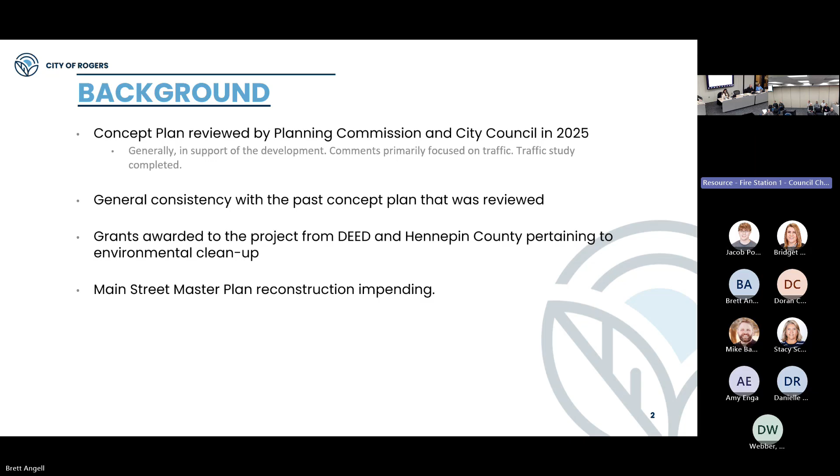A little on the property itself. The owner is currently Willis Enterprises. They were the owner operator that operated the site as a heavy truck repair and service location. There's also tire sales that took place via Hoosier Tires at this property. The developer is a combination of two, both Bader and Ebert. There are representatives from both entities here tonight, should you have questions for the developer. The total size for the property, it's currently 2 parcels, is combined at 4.61 acres.

It is zoned downtown mixed use and guided the same. The downtown mixed use zoning is a mixture of commercial and residential uses primarily. The current use, as mentioned, was heavy truck repair and service. This would be considered a grandfathered use or a non-conforming use based on its current operations. The proposed use is 181 units of market rate or luxury multifamily.

Some of the adjacent uses include commercial/industrial to the east, and I put industrial there for the Lensworks building that's in between this site and the Duffy development site. To the north is a proposed Civic Campus site. To the south is railroad, and then across the railroad tracks is industrial. That property is also grandfathered and is guided in our comprehensive plan as high density residential. And then to the west is industrial, but also grandfathered use and guided as multifamily in different master plans or residential and master plans.

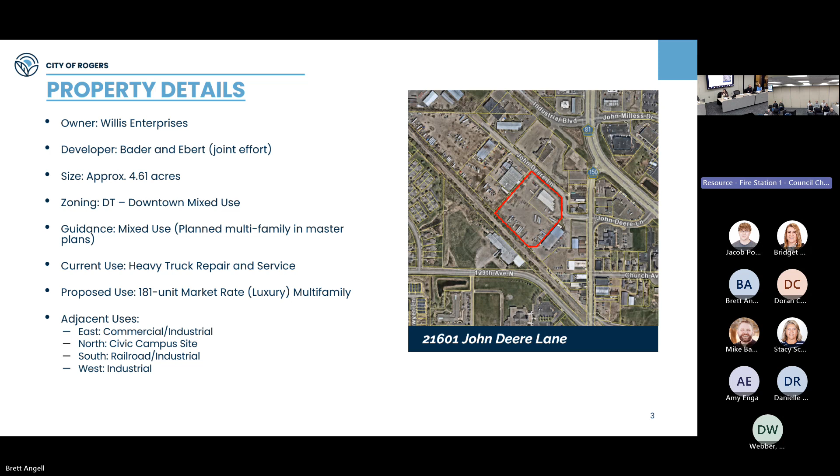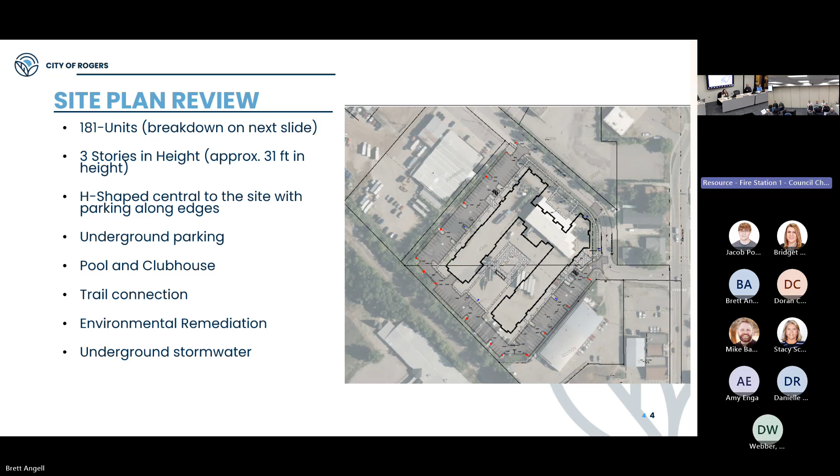A little on the proposed site plan. It's 181 units total. I have a breakdown in the next slide showing the different types of units. 3 stories in height, which is approximately 31 feet in total height, which is well below the maximum height limitations for the downtown zoning district. Overall is an H shape with the parking along the edges, underground parking, a pool and clubhouse and other amenity features, trail connection along the John Deere Lane frontage. And then, as mentioned, there is some contamination based upon the past use of the site, which would have to be remediated as part of redevelopment. And then for the stormwater, it would have underground stormwater.

A little on the zoning: this breaks down to about 39.3 units per acre. The downtown zoning district allows for up to 40, so it's within the range allowed by our zoning guidance. It meets all of our setback code limitations, but most of those are 0. Being downtown, we have the smallest setback limitations, and it exceeds all of those. As mentioned, it meets height.

It is consistent with the past and current master planning efforts we've done. Overall, based on current conditions compared to proposed conditions, there would be a reduction in total impervious surface.

Looking at the parking and unit breakdown, this is very consistent with what you saw at the concept level. Alcove and Studio units would account for approximately 40 of the units, 70 units at 1 bedroom or 1 bedroom plus den, 62 units at 2 beds, and 9 units at 3 beds, for a total of 181. As part of this process, and to understand more from the developer, we asked for a breakdown of what that equals in individual units and people within those units.

The anticipated average would be 1.8 persons per unit, so 326 individuals. It's denoted on the screen that this would be primarily adults, mostly because so many of the units are either 1 bedroom or studio units.

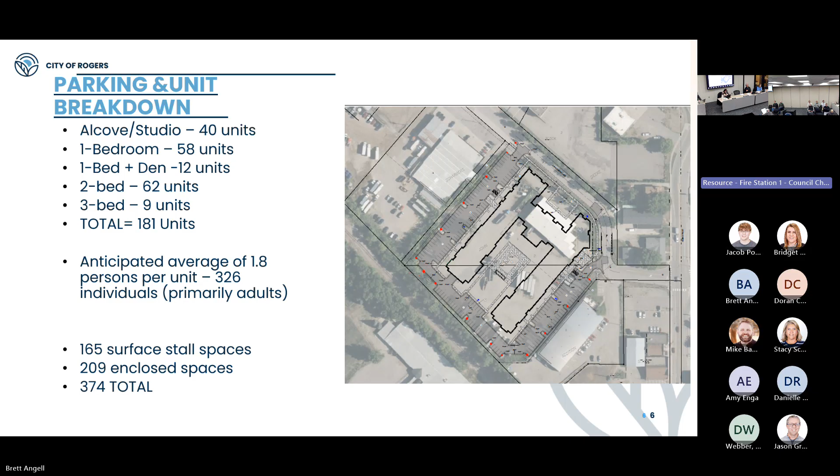For parking, there are 165 surface spaces proposed, as well as 209 enclosed spaces, for a total of 374. This is above what we would require by code. Our code requires 2 to 1, one of which must be enclosed, so they would be required to have 362. They're slightly above that, particularly in the enclosed spaces section.

As mentioned, they did complete a traffic study that was included in your packet for review. The assumption is a 2028 completion of the project, following the Fletcher Bypass being open to the public. In total, there would be 1,124 daily trips, including both in and out trips. They studied a few different intersections that would be the primary intersections corresponding to this development.

There are very minimal impacts to those intersections, with most seeing a 1 to 2 second change. I'll also note the consultant who completed the traffic study is here if you have specific questions related to that. One note on the last bullet point: the future potential John Deere to industrial connection was not included in the traffic study, so that would potentially further reduce traffic volumes onto Main Street. But that was not an influencing factor in the numbers you see for the intersections.

For the landscaping, 38 total new trees would be planted, primarily focused on the John Deere lane corridor. This is really to enhance the pedestrian feel for the John Deere corridor, which is a component of our master planning process, creating an overall pedestrian corridor as this redevelopment continues to the west. Additional shrubs and grasses are proposed along the edges of the building as well.

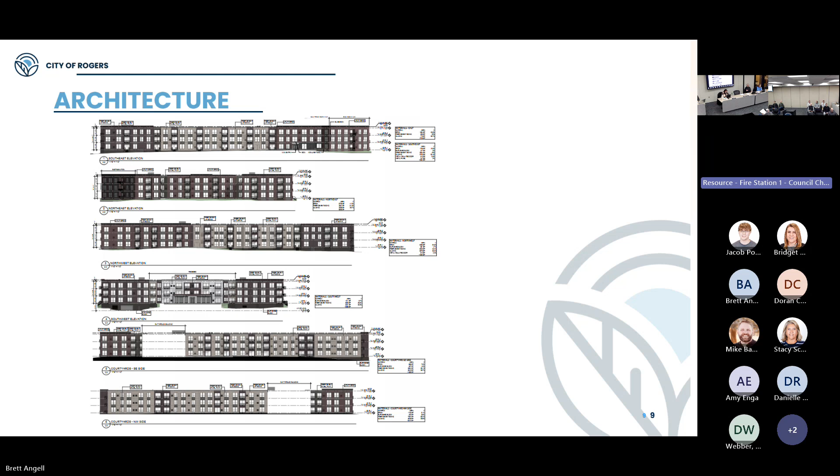So a little bit on the downtown vision. This has been part of past and current master plans and comprehensive plans, really seeking to redevelop some of the industrial uses away from Main Street, trying to focus more on potential uses that are more cohesive to Main Street, bringing those in.

Also removing substandard buildings and promoting environmental remediation. As part of this overall process, working with the developer, the building existing on site was deemed substandard. Integration of housing supports and advances commercial viability on Main Street - obviously the thing that benefits commercial businesses the most is nearby individuals who would shop at those businesses or restaurants.

Then, as mentioned, a big component from the architectural standpoint in discussions with the developer was the incorporation of brick to be cohesive with the varying generations that have developed on Main Street. Brick has been one consistent thing throughout. And then the incorporation of sidewalk connections for future pedestrian connectivity throughout the area.

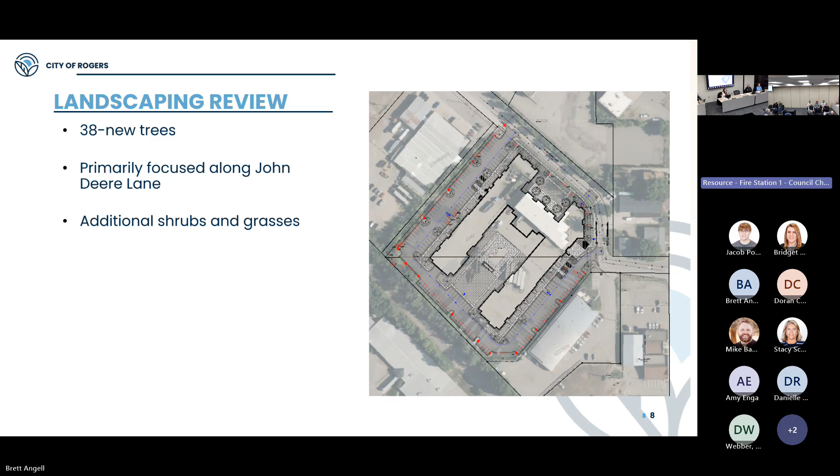Brett, can you explain that proof of parking? What is that? Let me go back to the site plan, that'd probably be the best way to show it. You can see the little laser pointer here. So what the proof of parking would be is essentially it shows that there is a potential to add it, but it wouldn't be built at the time of the development.

You see this very commonly with industrial developments, especially on the speculative side, where our code may require a high number, but they build less than that while showing they have the area to add the additional parking should it be needed. So what the Planning Commission's recommendation was, to look at that railroad side and see if some of those wouldn't be built at the time of the development, so that would stay as grass or green space.

Would it stay as impervious or pervious? It would be surface, pervious, yeah. Unless it was built, then it would become impervious.

Also one other thing to mention that I forgot to do during the PowerPoint: as part of the traffic study, we had them explore what a commercial use would be on that site instead of a residential use. The traffic counts were about 2.5 times higher as a commercial use, as a 30,000 square foot grocer, compared to this proposed development.

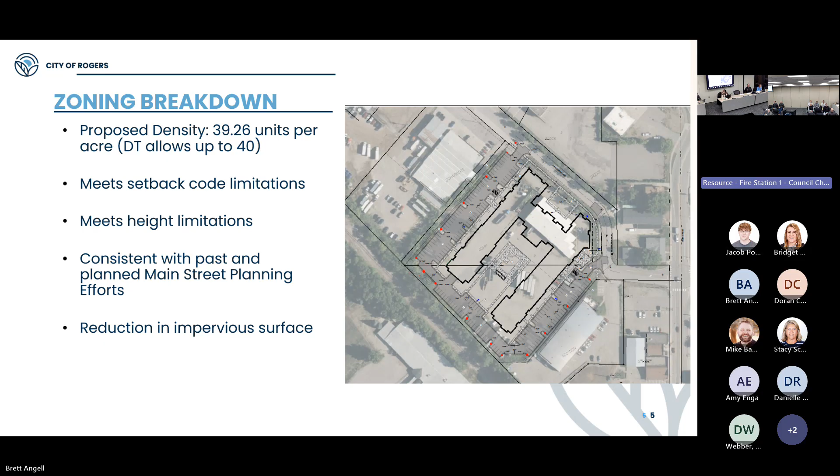Mayor, do you mind if I chip in with a question? Is that all right? Thanks.

Brett, so I see that in the proposed approval resolution, the first condition is that the applicant here would, if this gets approved, have to enter into agreements in the future. And then the fifth is that the site will have to be replatted to a single lot. Taken together, are you contemplating that there would be a development agreement, a subdivision agreement associated with this?

I can't tell if there are many public improvements on the development site or if there are not too many. Yeah, Madam Mayor and Council, we do anticipate that there would be a development agreement as part of this. There are not many public improvements for it, but just general consistency with and intensity of this development itself. There'll also be separate agreements related to it should TIF be granted in the future that would have their own agreements, but I do anticipate a development agreement for this.

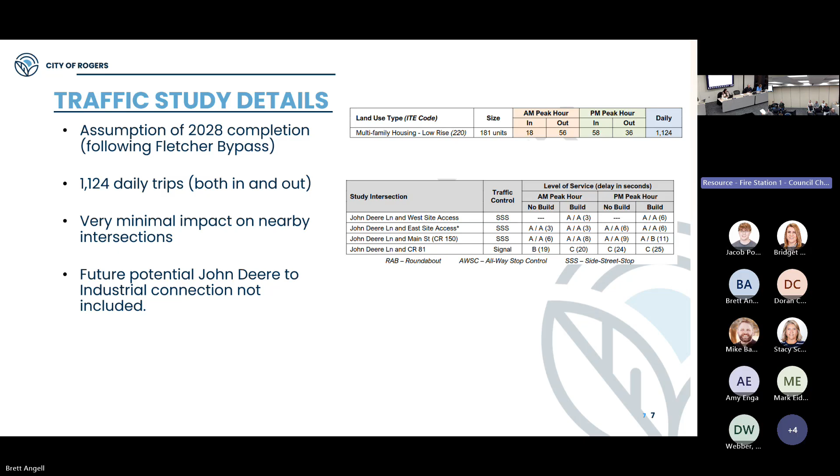Anything else, Mark? No, I think that's good for me. If we don't have other questions and we're ready to vote, I think we can move on because we don't want to belabor this too long. Been waiting for 40 minutes. Yes. Sure. There we go, sorry.

Given that we're short a council member, is it possible for us to table for one more meeting or a future meeting? I'll lean to our parliamentary experts. Mayor and Council, as I understand it, Brett will correct me if I'm wrong, this request for formal approval is contemplated by the code, subject to 15.99. In the normal course, you have 60 days to act on this type of request, and of course you can extend that out for an additional 60 days. So there's no timing issue with tabling. As far as whether in the normal course you do that when an applicant asks for it, I'd defer to staff on that. Certainly, I don't think it's uncommon for you to agree with an applicant to table, but you're not compelled to do that. That's up to you. And were you to table, certainly tabling because you have an absent council member is an appropriate reason to table, should you want to do that.

Madam Mayor and Council, should you choose to do it, we do have time on our 60-day period. We haven't done an extension yet, but regardless, it sounds like they would have been amenable to providing an additional extension anyway. But you do have time if you want to go that route. It is, as City Attorney Vos mentioned, council discretion if you want to go that route.

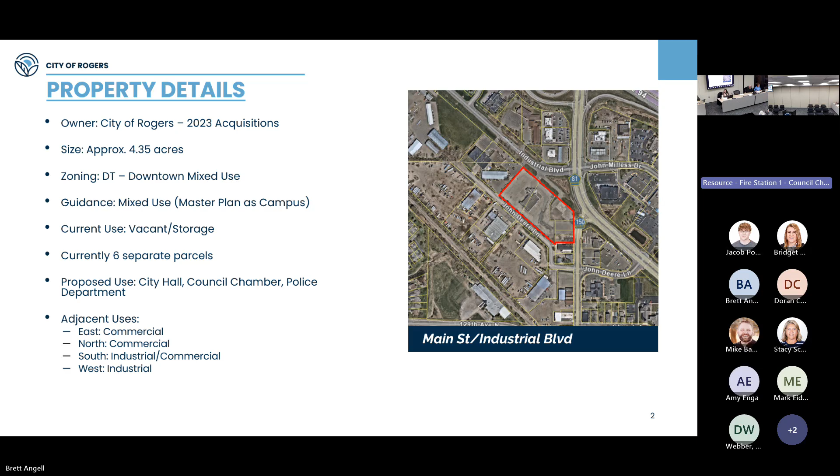The proposed use, as mentioned, is City Hall, council chambers, and police department. The adjacent uses include commercial to the east and north, south industrial and commercial, and the proposed development itself. To the west is grandfathered industrial.

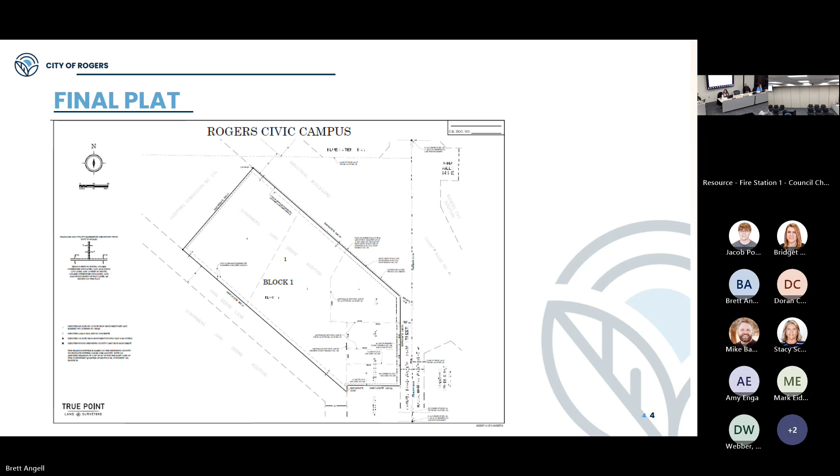The preliminary plat and final plat are both consistent. Essentially, this would take the 6 parcels and combine them into one, making it a straightforward and uniform property going into the future.

To the south, which would be the main entrance into the building, this is where you'd have the primary parking for both City Hall and visitors of the police department. This would also be the focal point for post or non-peak city hours being used for district parking. On the west side, this would be the gated secured area for the police department, with additional parking stalls not open to the public, used for police and secured purposes.

The primary entrance would be on John Deere, serving as one main entrance point. There is also a right-in, right-out on Main Street, as well as secured access points for the police department onto Industrial and a second point on John Deere Lane. In total, most of the building is 1 story in height, except for the police department section, which is 2 stories, as you'll see in future renderings. The police would also have an enclosed garage on the western side of their space.

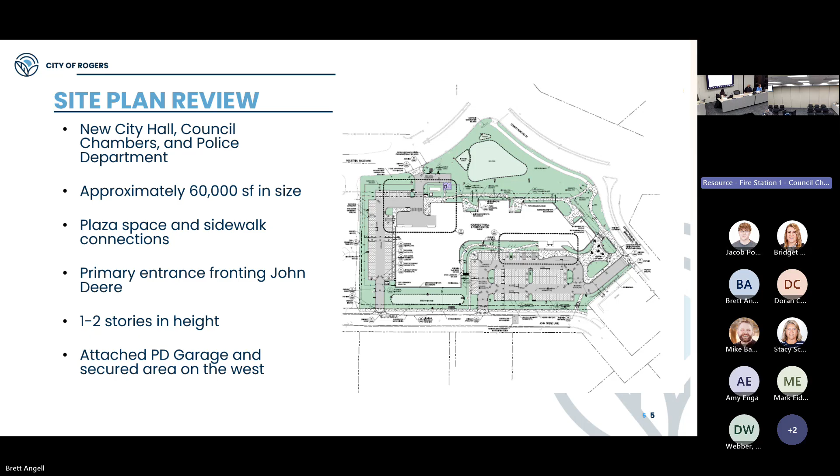This site would exceed our parking code requirements with 138 total parking stalls, 51 of those in the secured gated area on the western side and 87 public stalls on the eastern side. One goal of the site plan was to ensure district-wide parking during non-peak hours, since the city primarily uses daytime traffic, allowing nights and weekends to serve the overall commercial businesses in the area. This would all connect via pedestrian connectivity and trails corresponding to the plaza space, extending south.

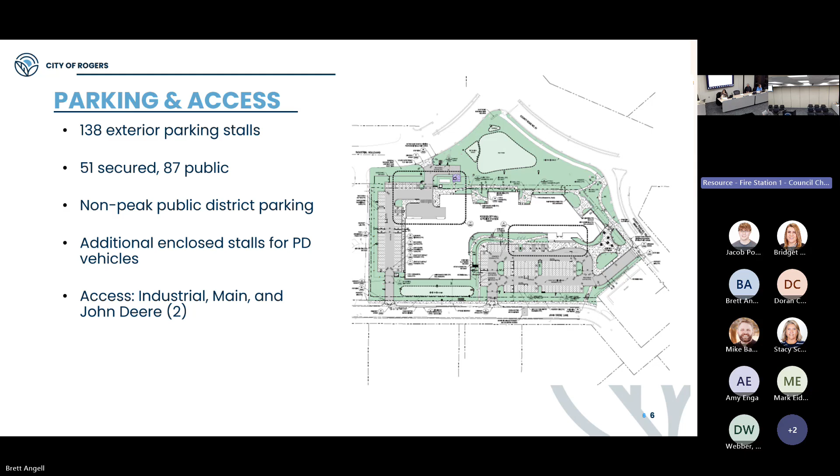Looking at the landscaping, it's a mix of deciduous, coniferous, and ornamental trees throughout the site, with a focal point along the north end where the stormwater pond is, as well as the south end, similar to the last development proposal, putting a tree-lined area to create a pedestrian-friendly corridor. Additional shrubs and grasses throughout.

One of the components, which you probably saw in the conditions, was really looking at the trees directly where the police department is, trying to diversify the mix of trees there for enhanced screening and for security purposes moving into the future.

Overall, right now, the former Boyer site is almost entirely impervious surface, so the proposed design, similar to the last one you saw, is a reduction in total impervious surface.

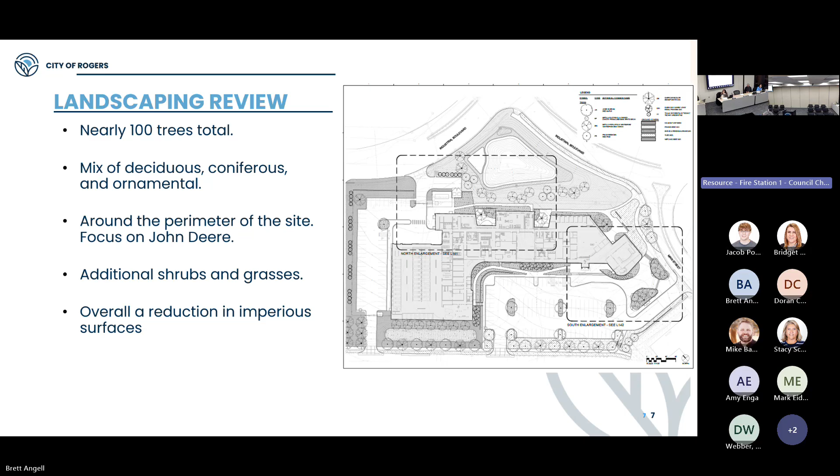One of the components that was a key part of the master planning process for the overall Main Street district, as well as this site planning process, was creating a plaza space that could be utilized for the public. That's shown around where the council chambers would be located. This is not an activated plaza space, but more of a retreat-type plaza space where people would have the opportunity to sit, more of a green space integration into the overall Main Street area, and a good incorporation of that gateway feel we're really going for.

The internal build out is more for informational purposes than site planning purposes, but as mentioned, council chambers would be on the eastern side with a conference room related to it. The main entrance is kind of right on the front south side, or John Deere side, and then you go to where the front desk would be, where you'd meet the various departments located within this building, including community development, finance, and admin.

And then on the eastern side, the building department would be located here. The western side would be the police department and IT.

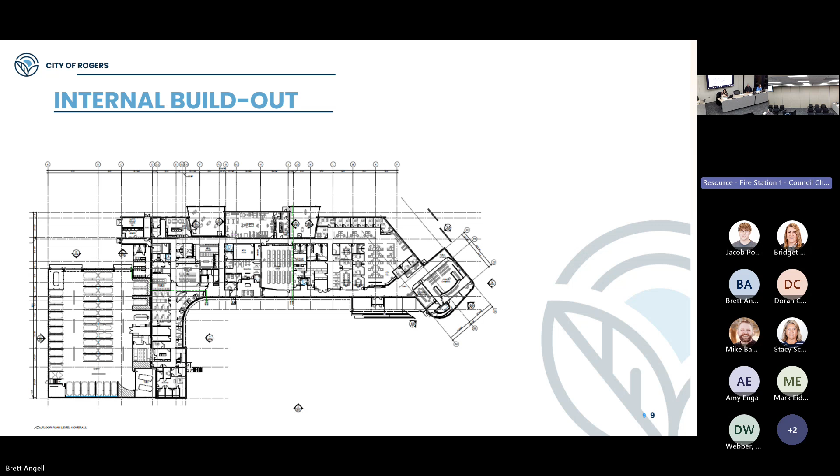Then there's overall conference spaces throughout, but really looking at our design for both now and well into the future, designing this in a manner that can incorporate our current needs but also any potential demands well into the future for the various departments. So there's quite a bit of exercises, which the council knows, looking at potential future staffing needs well into our growth years.

Architecturally, very similar to what you heard me say for the last development proposal. Big focus on brick, being that timeless piece that corresponds well with the overall surrounding businesses and buildings throughout Main Street. So primarily brick, with the exception being the police department garage, which would be tilt-up paneling more as a cost measure, but still meeting that overall feel for the entire district. Then separately, a fair amount of glazing throughout, which is windows, and some metal accents as well.

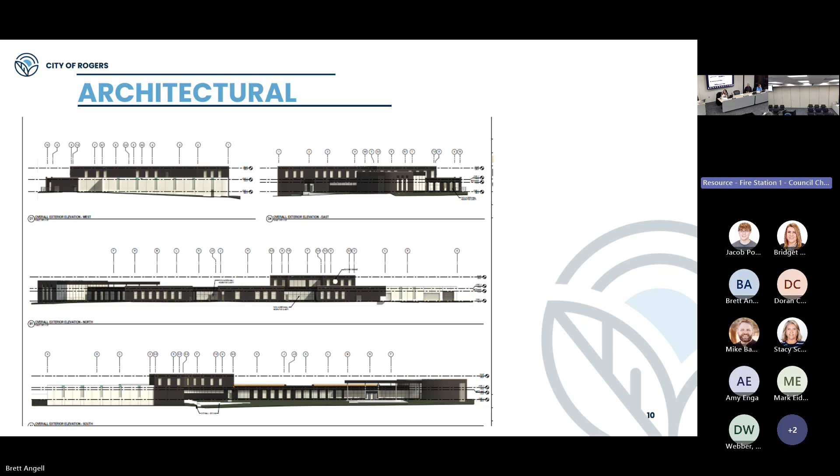Here are some renderings, the one on the right being the potential plaza space, and the one on the left-hand side being the view from the Main Street, County Road 81 intersection. The high windows area is more where the council chambers would be.

One note, since it was asked during the planning commission process, what this bump out is in the wall—that's more of a future activation space if we want to break up that wall as part of the plaza. It's not an area conducive to adding windows or anything like that. We're trying to incorporate some sort of future feature, which we haven't programmed yet—that's a future discussion—into the overall plaza.

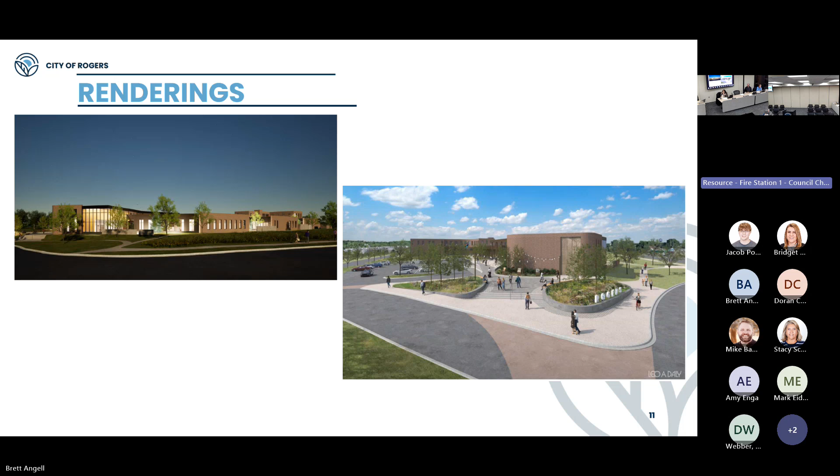This also went to the Planning Commission on February 2nd. It was a public hearing due to the plat. No members of the public spoke for or against the development. There's general support for it, with a clarifying discussion on the item mentioned next to the plaza space, as well as a recommendation to add an identified space for public transactions, like a Facebook Marketplace transaction, near the police department.

As you'll see in your resolution, there is a condition related to that. It's very easy to incorporate that recommendation into the overall plans. There's not a design change needed to do that—it's more of a signage and lighting item.

In the end, the Planning Commission unanimously recommended approval of the proposed site plan. So there is a recommended action in front of you, and just to note, this is not voting on the actual funding of the proposed development. It's purely corresponding to the site plan and plat. There are numerous future discussions and actions needed for the actual funding piece. This is just the site plan piece. I can stand for any questions, and other staff who have been very engaged in this project can answer questions for specific departments.

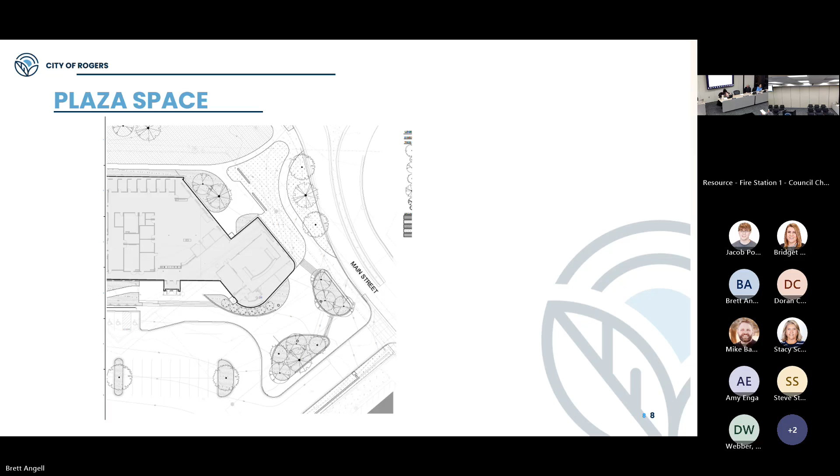Still on. I think Mark should be able to... Mark, any questions or comments before we vote? Is he on there, Steve? He is. Okay, he's muted. There we go, I was talking to myself.

Yeah, I think we all share concern for pedestrians, but I think it's designed well, and like you said Kevin, we'll be looking at this further to do what we can to make it more visible and conducive. When you look down Main Street, there are a lot of driveways, and it's really no different, we just have to be smart about it.

Just for the record, from the earlier question, it was the October 14th meeting that we approved a construction manager at risk. There are some details in that meeting online which give an estimate, and more details you can look up.